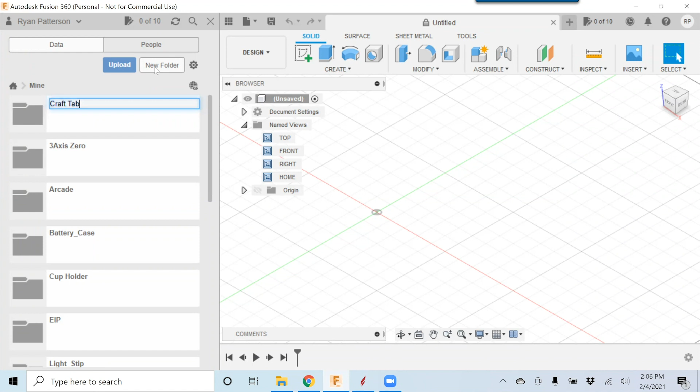So starting off, there is nothing in the folder. It is an empty folder. And we have our design space that is an untitled design space on the left. We have different views that we're able to view from the top, front, and the home.

There is the little, I don't know what he calls it here, the design cube or the orbit cube that you could click on and pivot the design around. Clicking on the top will view the top view, and clicking on any of the other views will show the different views.

If you are first coming to Fusion and have not had everything set up completely yet, and you're like, well, it's kind of looking a little bit differently because when you click top, it may not be the Z up. So there's a couple things that I would recommend doing to start with, and that is clicking your username in the upper right and go to Preferences. And when the preferences open, we want the default model orientation to be Z up.

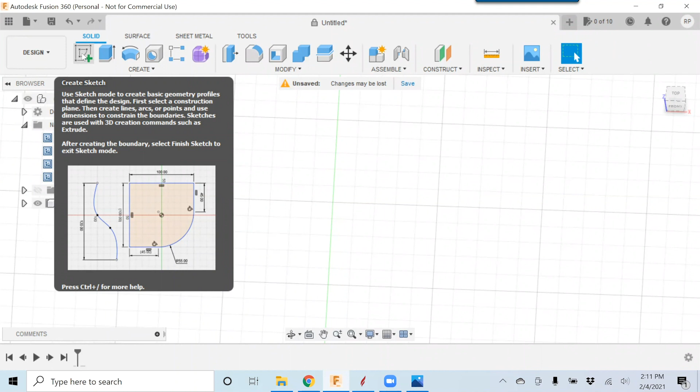The big difference that we have with Aspire or regular CAD versus parametric CAD like we have here, is we are drawing and designing a model. To create a model, we need a sketch to build the model from. So we have sketches and then kind of extrusions off of that. If you're familiar with SketchUp, it works very similar.

So the first thing we're going to start off with is creating a sketch, that is up here in the top left. Going to click Sketch, and now it wants to know what plane, X, Y, or Z, are we going to create this sketch on. So I'm going to click on the top view here, and then click this top surface there. This opens up our sketch tools, and I'm going to come in and out of it a couple of times. So hopefully you're bearing with me and hopefully it'll all come together when we get something drawn here.

So we have our tools across the top here for our drawing functions. If I want to just draw out a simple rectangle, clicking the rectangle tool, coming down to our drawing space, clicking once and moving over and clicking again.

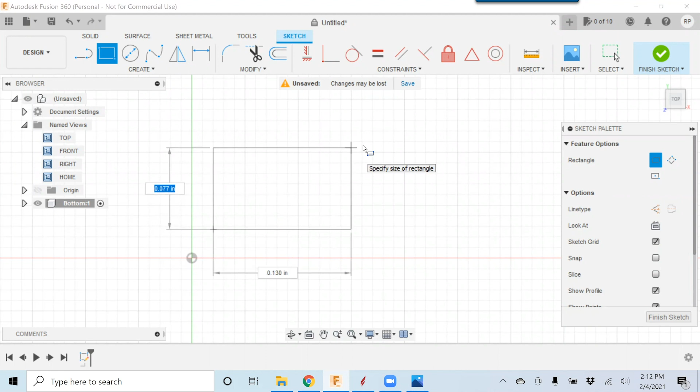I'm going to finish the sketch by coming down here to the bottom right and click Finish Sketch. We now have in our design tree, we see a bottom, and then we have a sketch. Right now it is a single sketch, and that is what we have on the screen here.

This is like a little eye that we could click off that turns that sketch off, and it turns it back on. If we want to model or change any dimensions on that sketch or change the size, right click on the sketch and select Edit. Brings us back into the Edit tools for the sketch. And again, we could click Finish Sketch.

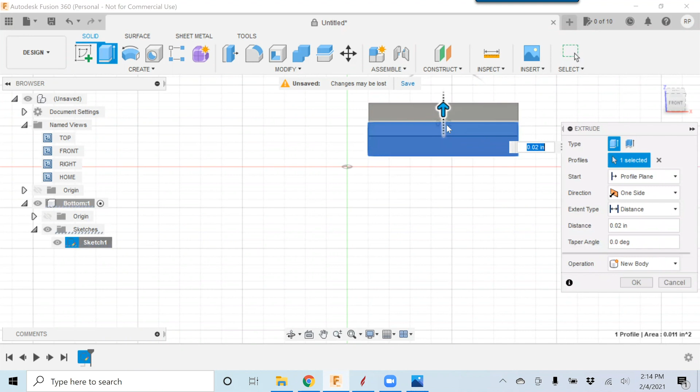To give this some thickness, rotate this around just so we can see that it is just made up of lines, has no thickness yet. I'm going to use the Extrude function. And you just click and extrude. So I'm really not paying attention to exact sizes on anything yet. And this is just the very basics on being able to model and create an object, which is just a basic block at this point.

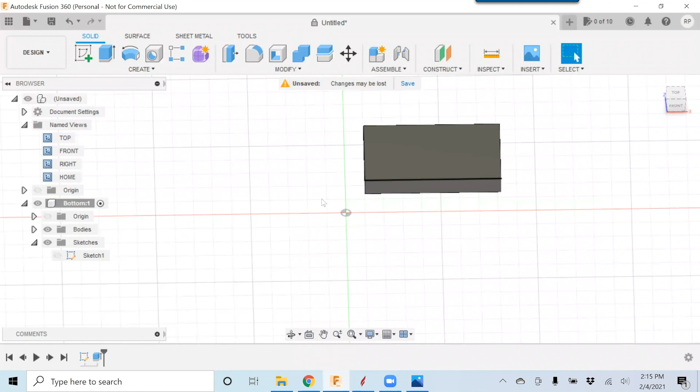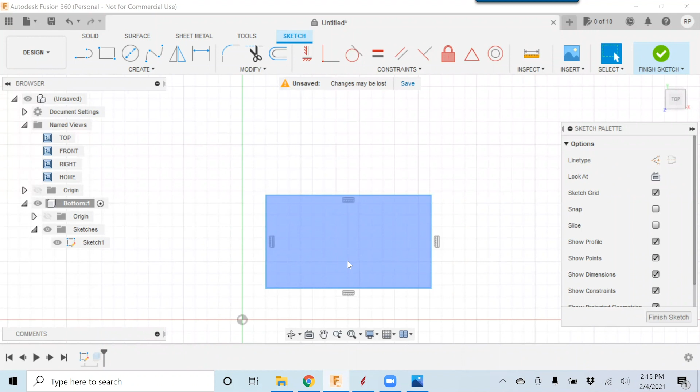I want to add dimensions to this and be able to set the size. So this is where we start seeing some of the parametrics of Fusion. So dimensioning is more than just dimensioning for a drawing or for a presentation. Dimensioning is constraining an object to a set size.

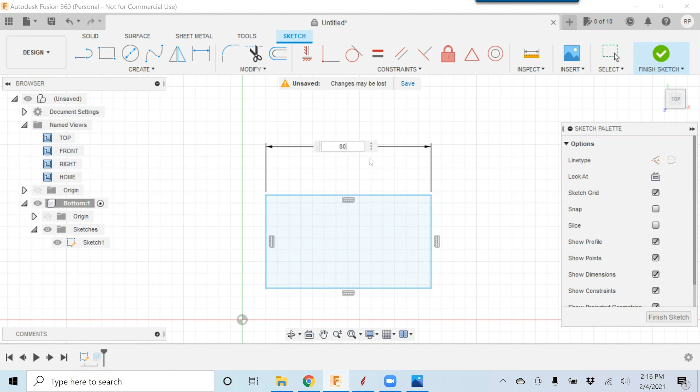So if I click the dimension tool and then come down and notice when you click over top of a line or an object, it highlights in a thicker colored blue. I'm going to click and just drag that up. And we have a dimension there that I am now able to enter in a size. So let's make this 80 inches. And that just grew out there to 80 inches.

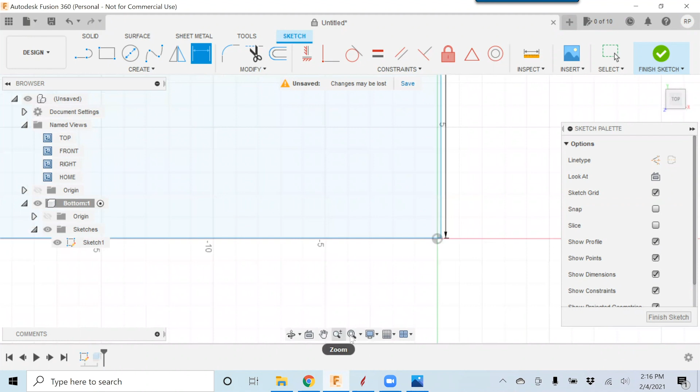And I want to do the same thing for the other dimension, and let's make that 40 inches. So we now have a rectangle that is 80 inches wide by 40 inches tall. We could modify the size of these dimensions anytime we want by double clicking on that dimension, and we could make that 48. And we could see that all of that automatically changes.

That is, if you're not familiar with it, kind of exciting. But it gets much better than that. So we're going to finish this sketch, and we're going to adjust the thickness of this. The thickness is what we have extruded that to.

Across the bottom of Fusion, we have what's called the timeline. This is done in the order of creation. So we've created a sketch, then we have our extrude, and nothing else done. We're going to end up building out more on this. We'll have more sketches, more extrudes, and more data here as we continue on.

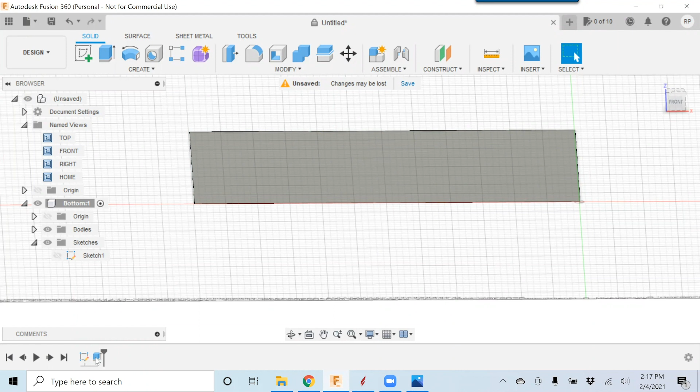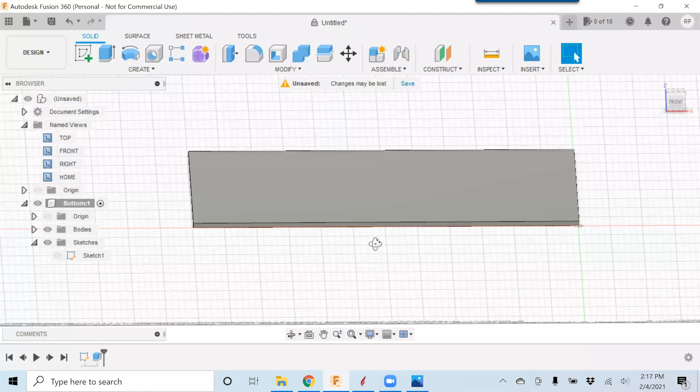I want to edit this extrude by selecting it. I'm going to right click and select Edit Feature. And I'm going to enter in a dimension of 0.75. That's the material that we have for today. So that is the basic rectangle that we would use or have for the bottom section here.

Now I did mention early on that for material thickness, we may want a global variable that we could modify in one place and have multiple items change. We could do that. I'll show that in just a little bit, but before we do that, let's put in some other dados. Maybe I have a dado running right down through the center of this board to create and hold and locate a center partition. So let's learn how to add that to our model here.

I want to edit and create a new sketch. Going to create a new sketch, and the first time I selected the plane, the XZ or XY plane. This time I'm going to select the face of our 3D model. So that means all new sketches that we're drawing are going to be applied to the surface of this face.

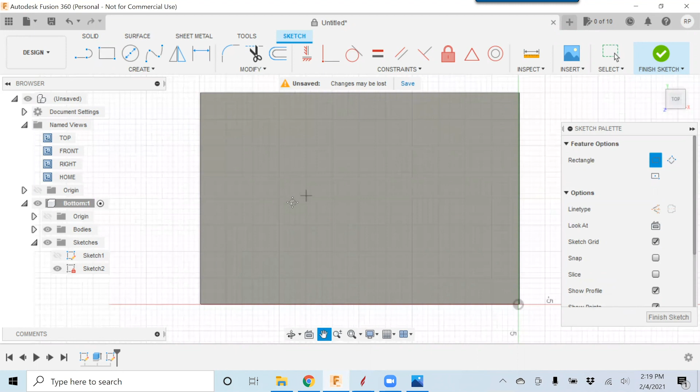And to make that fairly simple, again, I'm going to bounce in and out of this a couple of times so we could see how the relationship goes. And I apologize for those that may already know all this. This, I think, is one of the more challenging parts of Fusion to understand. And once we understand all the relationships, it makes everything so much easier to learn and use.

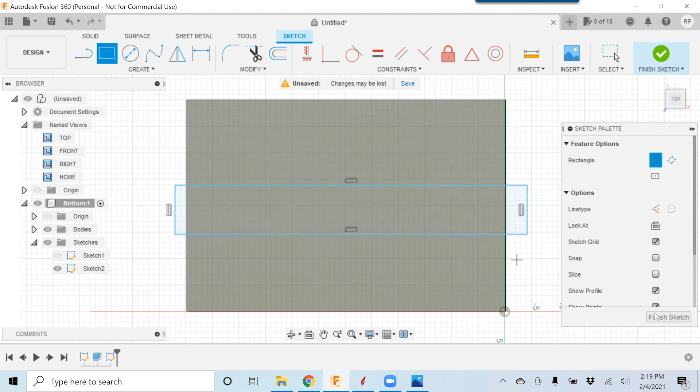So I'm just going to draw out a rectangle. Didn't worry about size or any of that. I just put that in here. And I'm going to finish the sketch. And just as I extruded the main sketch, I'm going to extrude this here, and we could come down with it. And I'm going to enter in a dimension of minus 0.375, which is half the thickness of the material.

And we could see that that is what we have there. But that material or that dado is way too thick. We want to shrink that down and start constraining this to always be in the center of the width. And we also need to constrain the end.

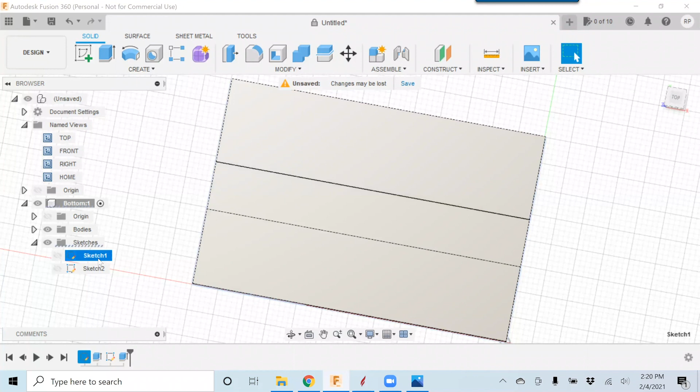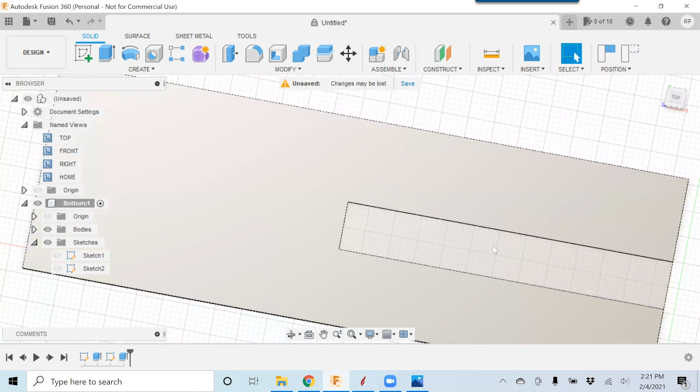So if I edit the first sketch, let's just see what happens here. I'm going to edit this sketch. And instead of 60 inches, just to make it very long, let's go ahead and make it 120 inches. We'll then finish this sketch, and we can see that that dado no longer goes all the way across. So that's what we're going to focus on now and figure out how to always have this dado stay within the center of this object and also within the length.

So coming back into the first sketch, I'm going to bring that back down to a manageable size of 72 inches this time. So we have, again, our main sketch, and then the sketch that is applied to the face of that. So that is what I want to edit, coming into Edit Sketch.

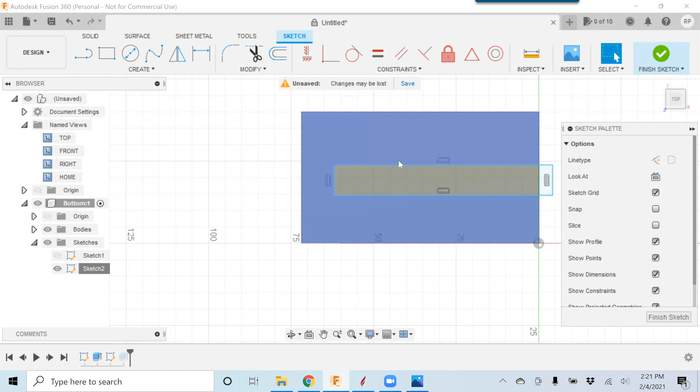And now we're going to start looking at how to constrain our drawing objects from one object to the other object. Constraints are just like the dimension that we put in, and that could be the first constraint that I give it. So I'll give it a dimension constraint, and I'm going to enter in 0.75 for that dimension.

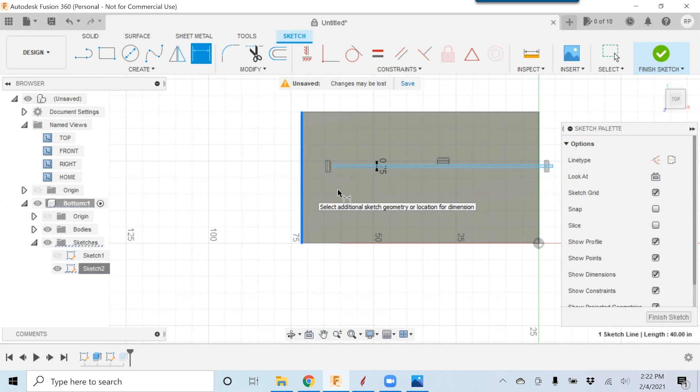And I always want to have the width or the length of this dado to be the same length from the outside to the outside. So you might think, well, the best way to do that is dimension this line here to be 72 inches. Well, yes, that would work, but we want to make sure that that rectangle, that dado, is going to increase in size when we change the size of our main sketch.

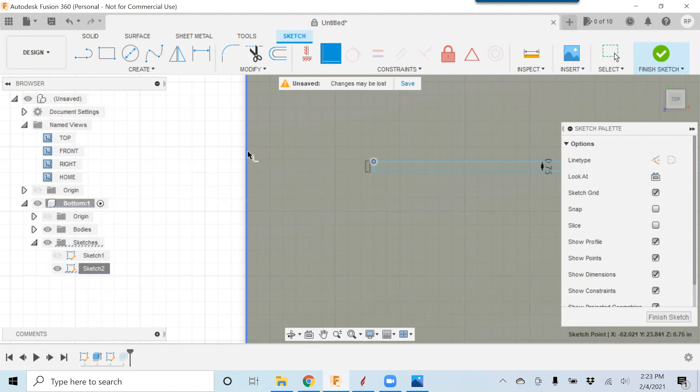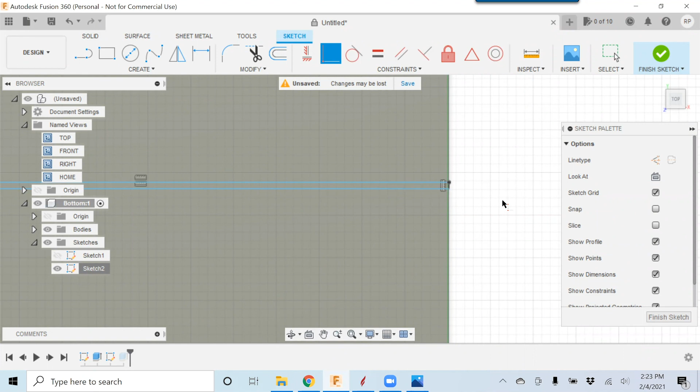So the first thing I'm going to do is click the coincident constraint. This is now able to say, I always want to have this point be on that edge. So you see how that just kind of moved over? And I am going to come over to the right side and do the exact same thing, use a coincident constraint from that corner to that point right there. And that now means no matter what size we change the main sketch to, from 72 to 120 to 48, this dado width is always going to be the width of that main sketch.

What we have drawn so far are drawing objects that we're able to extrude and move from. I always want to have this to be in the center of our sketch here. Now I did say that was 40 inches. So again, we could dimension this and say that I want to have this edge to this edge be 20 inches minus half of the width. Or we could allow it to automatically create and constrain this to the center.

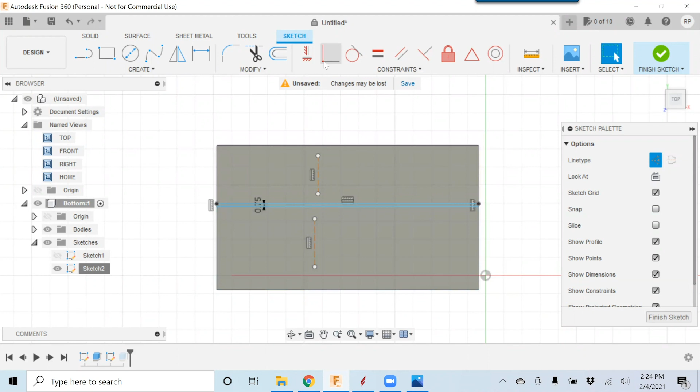And the way I do that is I like to use construction lines. Some software would call those reference lines. So with that selected, when I draw in a drawing object, it is not blue, it is kind of this gold color. And that is just like a guideline or a reference line. And I'm going to use the same constraint that I used for this rectangle to say that I want to have this point to always be there, and the same for this point to always be on this edge.

Going to look at another constraint here, which is a midpoint constraint. Not that we really need to have it, but just to help keep construction lines in a logical position. So I'm going to say I always want to have the endpoint of that construction line to be at the midpoint of that line right there, and the same thing for this bottom one. Now that in itself has not done anything to constrain the position of the rectangle. We could still kind of drag and move this around.

The way I'm going to constrain this to be in the center now is use what is called the equal constraint, where we are able to say, I always want to have this construction line... Let me undo that.

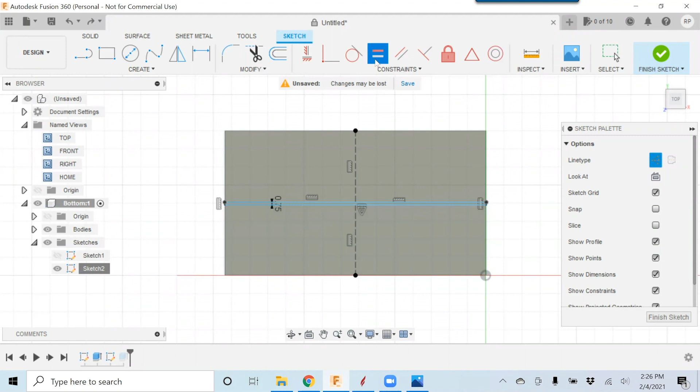To where we could say that I always want to have this construction line be equal to the width of this construction line. Now notice when I did that, my main rectangle there is no longer blue. It has become a solid black. That means that that part or that drawing object now is fully constrained and we cannot move that around with a mouse anymore. It is kind of locked in place and is always constrained to be really in the center of our main part.

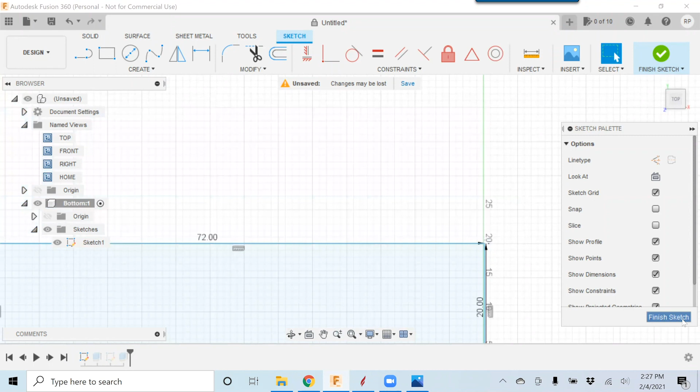So we could finish this sketch and we could see that that will now always remain in the center regardless of what we set the dimensions to on our main sketch. So if I bring this down to 20 inches, we see that that dado automatically recenters itself in the center of our main sketch. I'm going to open up that main sketch again and increase back to 40 inches.

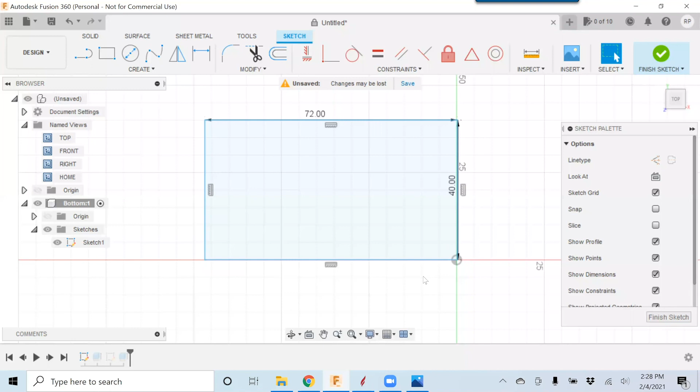So it's asking about why not use, yeah, I mean, there's several ways of constraining a part to be equal. So what I could have done and what's being pointed out is instead of me using the construction line here and setting it equal, I could have set this line to be constrained to the midpoint of this one. That can be done, absolutely. There is no right or wrong to the way you constrain it.

The one thing that I like to do, especially if you're collaborating with a lot of people, is trying to be consistent on the way you constrain parts in models. So when you're working on a model that somebody else created, it is somewhat obvious how it is. One reason that I did this, not to say, like I said, you couldn't use those midpoints. I put the construction lines in there that way, and you see the equals constraint right here.

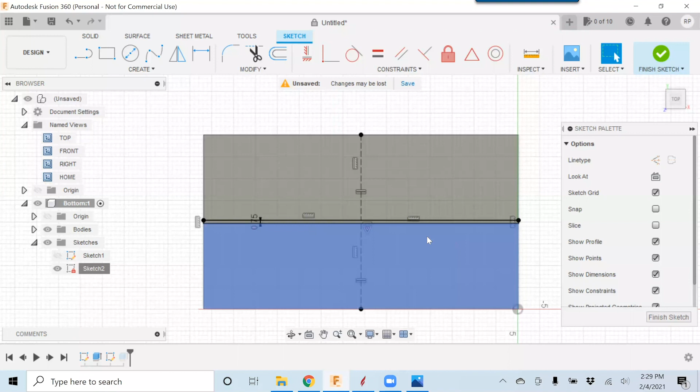It becomes obvious to me when I open this same model up a month from now, and I want to move something or readjust and wonder why that is not moving. It's sometimes hard for me to see constraints that are kind of hidden off to the side. But if I open up this model and I see a construction line top and bottom, that tells me that I was constraining it in such a way. We will see more constraints on how to connect short lines because we're going to have several dados, just like what we created here in the center.

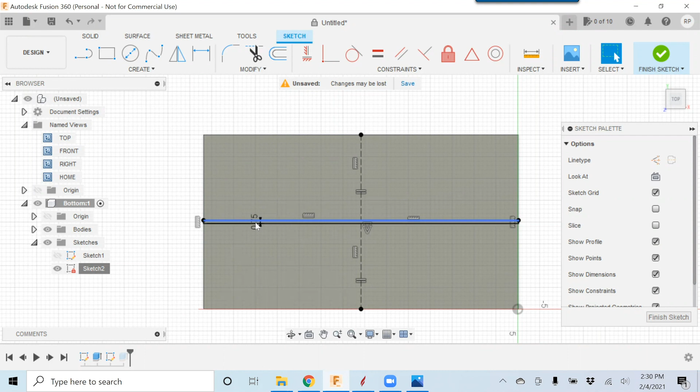Now, we're seeing constraints. Hopefully you guys are getting excited about this because it's exciting just being able to change one dimension and have the whole thing automatically change. We're going to take it one step farther now, because we have this dimension here of 0.75, which is the same dimension as the material thickness. So if we cut this project today and we have 3/4 inch material, but tomorrow we want to cut the project again, but we ran out of 3/4 inch material, we only have 5/8.

Well, that means we're going to have to go into each one of these sketches and modify that dimension 0.75. Yeah, it's not hard to do. You just open that up. But there's some magic here that makes that much, much easier for us, and that's our variables. Let's see what they call them. Parameters is what they're calling them. So coming up into Modify and coming down to Change Parameters.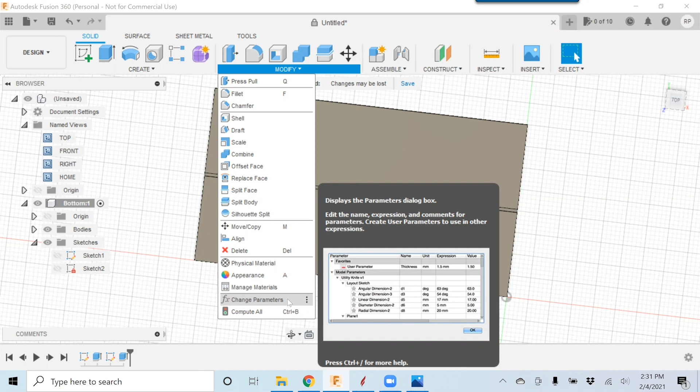Now I'm going to give a warning about variables, and I'll say it again after I show what they are. Be careful how you use them. New users to parametrics tend to overuse variables and make a lot of variables that aren't necessarily needed. So really put thought into what variable names you use and how you use them. So let's see what a variable is.

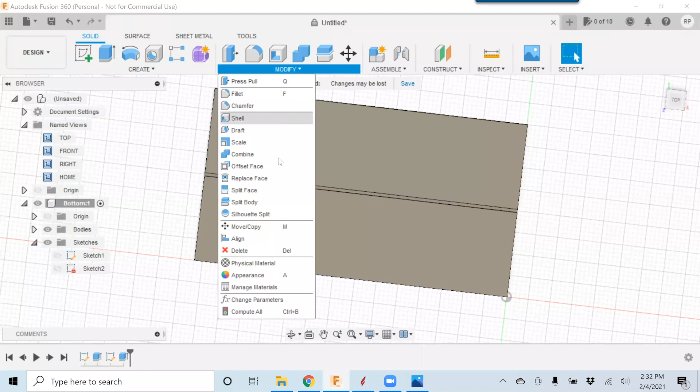So coming up here to Modify and Change Parameters, we are going to add in a user parameter. We'll end up coming back in here again and adding another one, but I'm going to first click the plus sign, and the expression, meaning the dimension of 0.75, and we'll say OK, and then OK here. So we do have a name of material thickness, so I'm going to say OK. Coming back into our dado sketch.

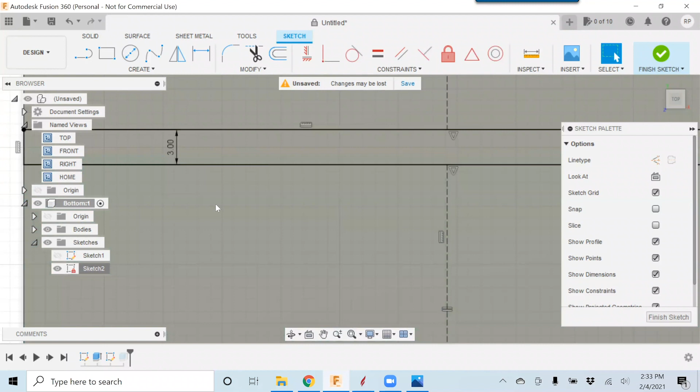And we have this dimension here. Remember I said we could double click on that and change the dimension. If I want to make that 3 inches, we could do that. Automatically goes to 3 inches. And because we have our construction lines that are equal to one another, that stayed in the center.

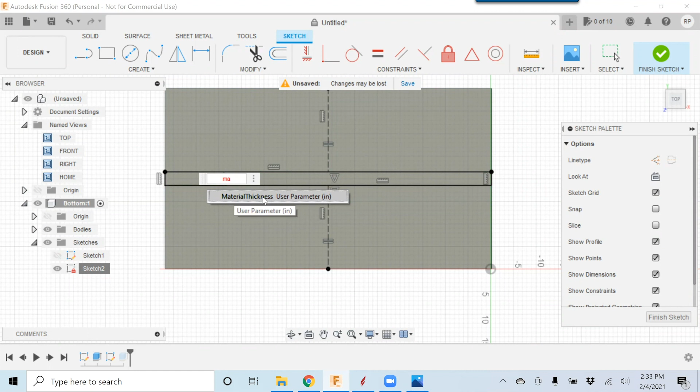But now here's the magic of that variable that we just created. I'm going to double click here. Rather than putting in 3 inches or 0.75, I am going to start typing material. And we see that it automatically pops up our variable here. So I'm going to click on that and say OK. Now it gives us a little prefix there that's indicating that that is a user variable. And it is at 0.75.

So now what that means is when we come up into our change parameters, let's scoot this off to the side, I could enter in a new value here of 3 and enter. And we see that that automatically grew to 3 inches.

This is like an infomercial, but wait, there's more.

So one thing that we have to do quite a bit is, a 3/4 inch thick material putting into a 3/4 inch wide dado is probably not going to fit. You're going to need a good sized mallet to smack that into a perfect fitting dado. We want to make that dado just a little bit bigger, maybe 10 thousandths, 0.01 thicker. And we always want it to be that thickness.

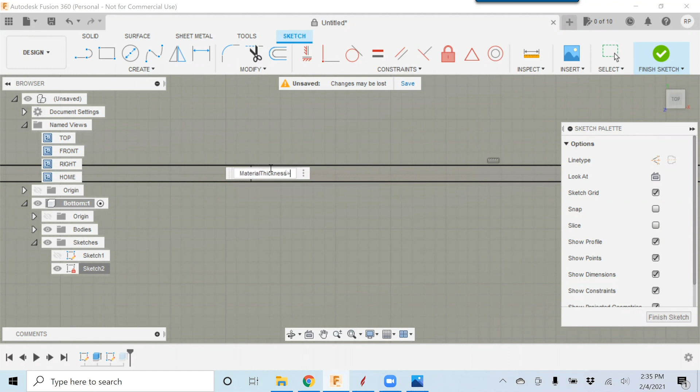So I'm going to right click and edit that sketch once more and double click on that dimension. And now we have our material variable listed there. I am going to say it's material thickness plus 0.01, then enter. So now that is always going to be 10 thousandths bigger than whatever value we entered in there for that variable.

Variables could be used wherever a dimension or a size is used. So if you remember, we specified the thickness of the main extrude, which is this extrusion right here. So I'm going to select edit. And remember, we set that to be 0.75. Instead of being a hard-coded 0.75, I'm going to use the material thickness there as well. Since this is the actual thickness of the material, I'm not going to do any math for that. We'll just leave that to be that thickness there, and we'll say OK.

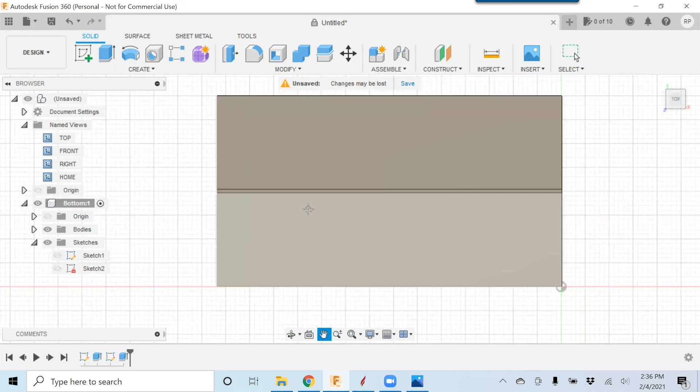So let's go ahead and create two more variables. We have on our main sketch the length and width. Today we're doing a 72 by 40, but tomorrow we might want to do 80 by 48. So let's go back in and create two more variables. And the width will go 72. Let's go 40. You've got to think about how you're going to use these variables as well. And then we'll do a length. And we'll go 72 there, and we'll say OK.

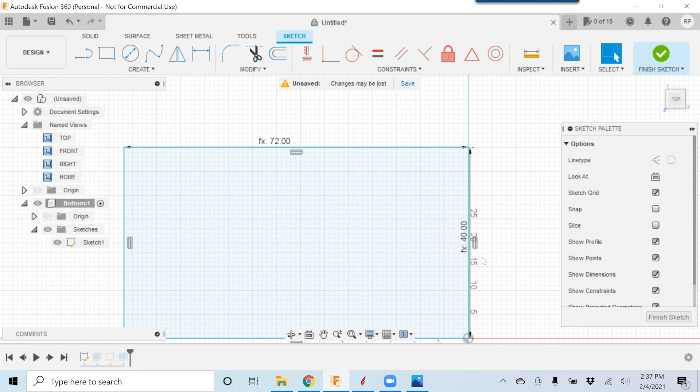So with those two new variables in place, let's modify our original sketch and change our hard-coded dimensions here to our newly created variable dimensions. And variables are made up names. They could be whatever you want them to be named. Something somewhat logical that represents what that variable is actually doing is best practice, but it could be named whatever you would like it to be named.

So we now have somewhat of a parametric part that is easy to change and always keeps a dado in the center. And again, to change any one of those sizes, it's coming back into modify, change parameters. And now if we change this from 72 to 84, we now have a piece that is 84 by 40, and that dado is still remaining in the center.

Yeah, getting ahead of me. Yeah, that's a good one. That is where we're headed now.

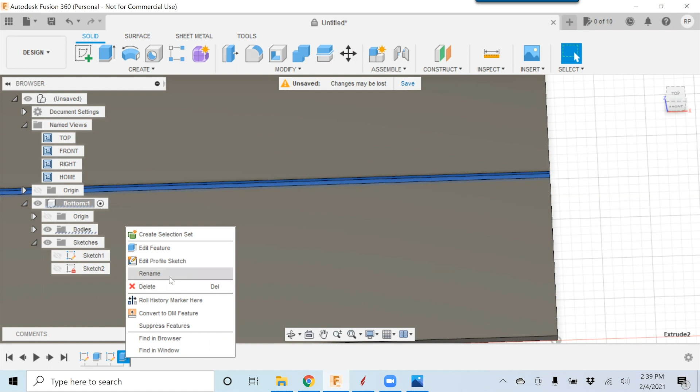So what about the dado thickness, this material? So right now, we hard-coded this dado right here to be a depth of, I think it was 3/8 of an inch. So say if we were going to cut this out of 5/8 material, that dado could be a little bit weak at that point. So we really want to have some sort of relationship of the thickness of this dado to the material thickness.

Now, pay attention to that negative sign in front of that value right there. That negative is saying that we are going down into the material. So if I just put the material size in here, it is not going to go down into the material by that setting. It's going to be projecting up. That's not what we want.

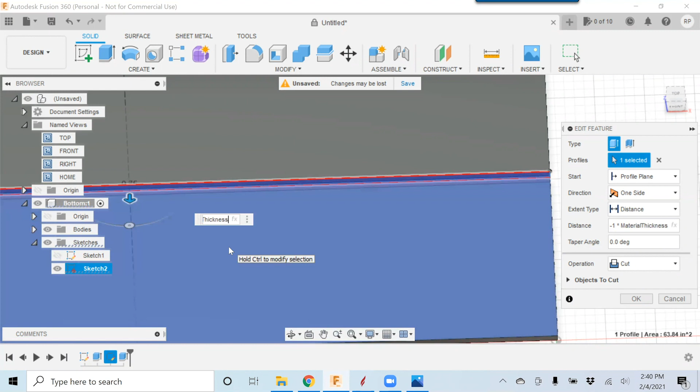So if you remember, two negatives make a positive, a negative times a positive makes a negative. Well, you know what I'm talking about. So we're going to go -1 times material thickness divided by 2. So that is going to allow us to control the depth of that dado based on the material thickness.

So hopefully everybody is starting to see the benefits of this. Now, some of you might be head spinning a little bit, trying to understand what's going on. Another bunch of you is probably saying, well, just move on with it already, I understand it. Well, we're taking it slow, and hopefully by next week, all of you will be able to create a parametric model like this, so that we could continue on with assembling this and checking the fit to make sure everything fits together.

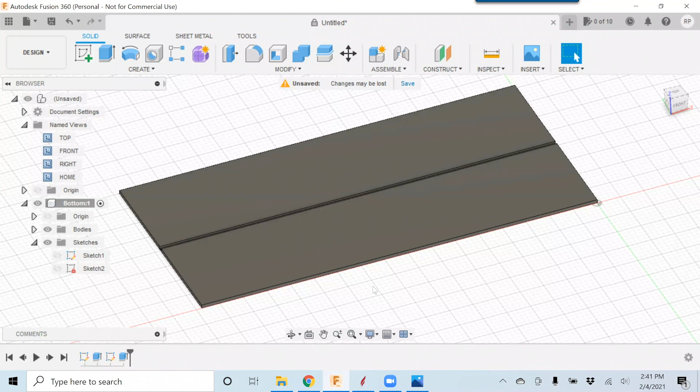So Paul is asking if there is some sort of data table behind the scenes somewhere. There could be. I am not familiar with it, so I will try to answer that question next week and get that answered for you. So let's just move on and create one more dado or a couple more dados, and then we'll look at how to add another part or create another component.

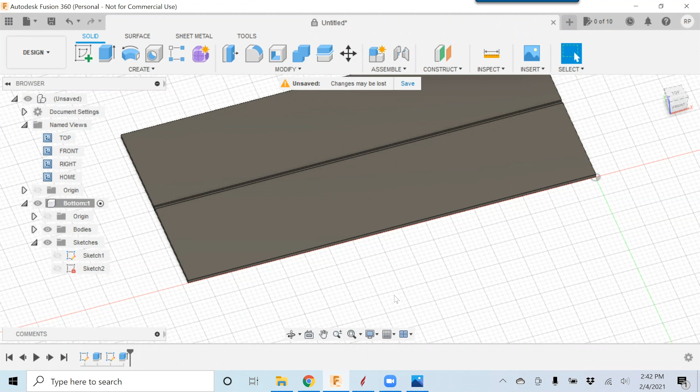Yeah, one question that was brought in: adding the tolerance. Could we add a variable to add in that tolerance? I added that 0.01. So yeah, you could have a variable that's called tolerance. And that is where I would caution you a little bit, that might be getting into the realm of overthinking variable names or over-variabilizing, if that's a word at all, the parametric model.

So I want you to think, when you're creating a variable, will we ever need to change this in the future? If yes, we are going to need to change the size of this width or this tolerance a lot, based on material thickness and all of that, then yes, you might want to add in some sort of tolerance variable. But if regardless of material thickness or material type, your tolerance is always going to be that 0.01, I would not make a new variable for that.

But let's focus on creating another dado, or actually a couple more. So I want to create a couple dados on the face here. Before, I was selecting create sketch, then the face that I wanted to create the sketch on. This time I'm clicking the face, then create sketch. Either way works. As you see, this time it just automatically brought us into this.

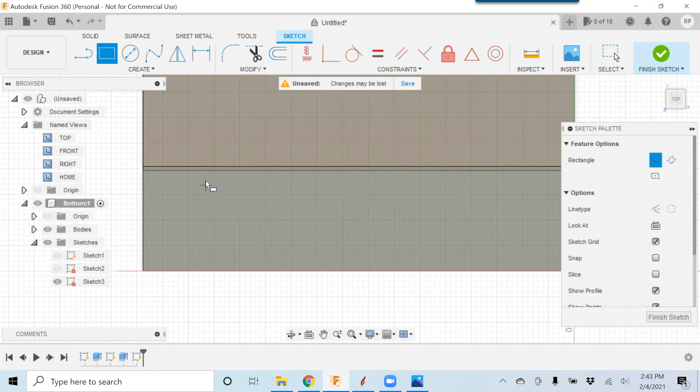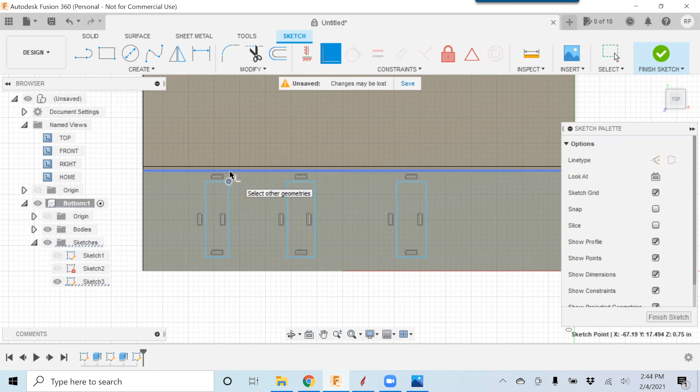So to more quickly go through this, I'm just going to draw out a couple rectangles, and I am not worried about sizes yet. Just put 3 of them in there. And now I'm going to start constraining these. Again, we have our coincidence constraint so those are always the same size. Now, my next step, there are several ways of going about it. This is my method. I'm just making them different lengths to show one more constraint here.

What I'm going to do is create a construction line from the endpoint out from each one. Now notice that really did not go to a construction line, but another line did. So this line right there is a construction line, because it was selected when I clicked that button. So if any lines are set not as a reference line but an object line, you could select it, come over here to the line type, and tell it that it is a construction line.

So the reason why I moved these to different lengths is to show the 2 variables or constraints that we have here. They're a horizontal and vertical constraint. For those that are coming from SolidWorks or Inventor or other programs like that, you usually have a horizontal constraint and a vertical constraint. Well, Fusion has linked those together, and it is pretty smart about which one it wants to do. And it's going to pick, in this case, horizontal because these lines are more horizontal than being vertical. So now when we move 1, all 3 of those dados,

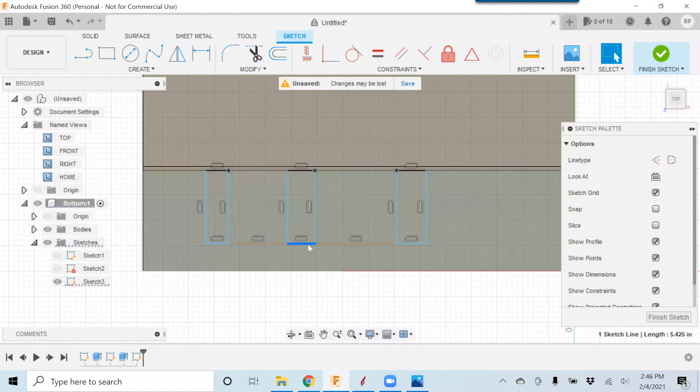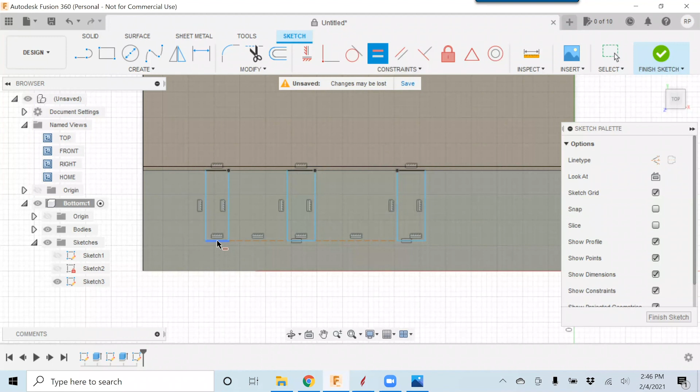rectangles, shift and change size. The other thing that I like to do is make them all equal to one another because I always want to have those the same size. I could come in and set a dimension to each one. That would work just the same way, but I like to minimize the amount of dimensions and use the constraints. And that is so that when you come back into it later, you change one variable and they all will change the same. So my next step is creating all of these rectangles to be equal to one another. So now when we change and drag the width out, you can see all three are going to the same size.

I also want to point out that, see, we have this light blue line that is making up that rectangle, and then the back section of this line is black. So the black line is saying that's constrained to this line. You're fully constrained there, but the blue, we are not constrained.

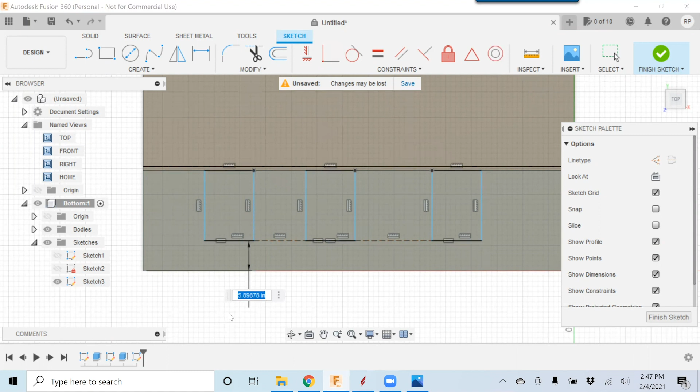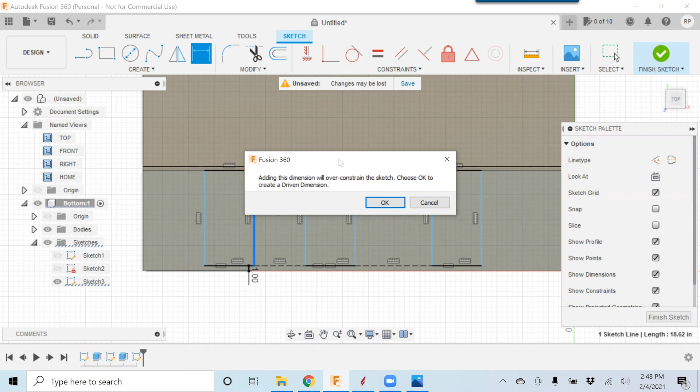So what can happen at times is if we have, say, a dimension on a line, or if I said, let's have this always be the same size as here. Let's go ahead and do it this way. I apologize, skipping around. So let's give this a dimension from here to here and say that I want that to be inset maybe 1 inch. So we have the back side is constrained, the front side is constrained. Well, what about the depth here? Can I set that to be a number? No. So I'm getting a message that says that I'm over constrained, that I can't do that. And you could get a message like this frequently until you start understanding where and how the constraints work.

So what has happened here is I am locked in and constrained to the backside of this dado. I also have the front side constrained, which means that the width of this line here cannot be changed other than by changing the width of our main sketch. Hopefully that explains it, but it's just over constrained; we can't have more than one variable that controls the width. So we have a constraint to the front. We don't have one on the width. So this is where I am going to use the dimension again for this one and set it to be the material thickness plus 0.01.

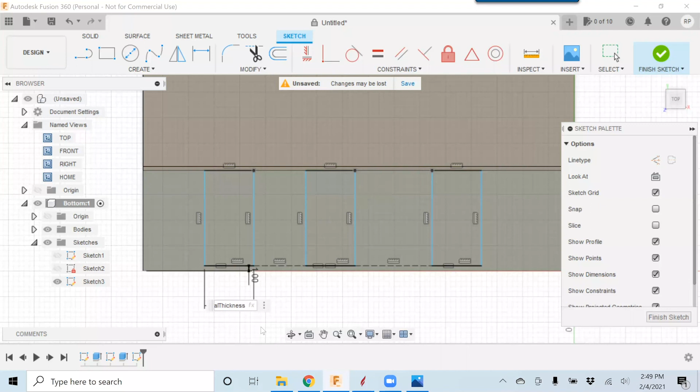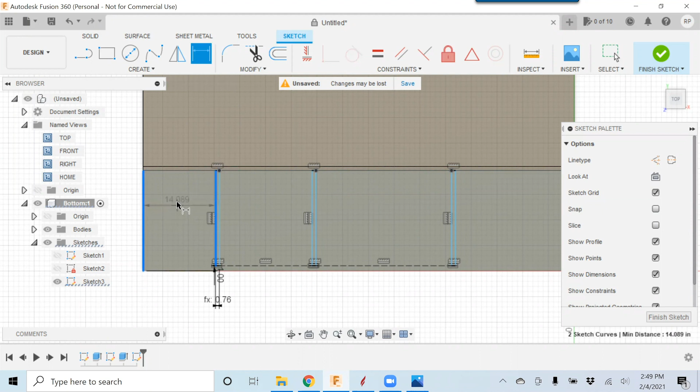Now we still are not yet fully constrained. I know that because we have these blue lines there. We could still move them right to left. So now I'm going to set some fixed dimensions here because I'm always going to want a shelf off to the left. I always want that space to be 14 inches, and the space between these two here, I always want to be 18 inches. And then the space in between these two, let's set that one to be 24 inches.

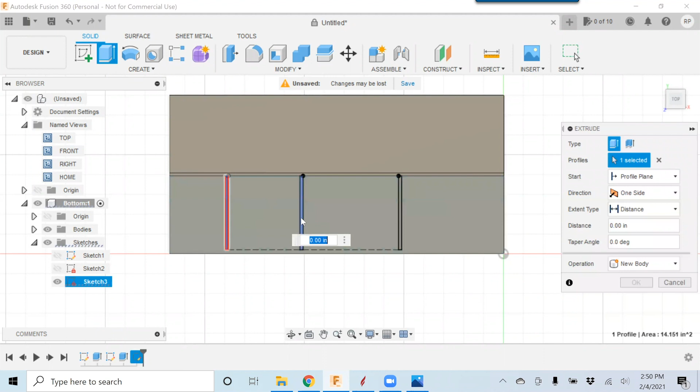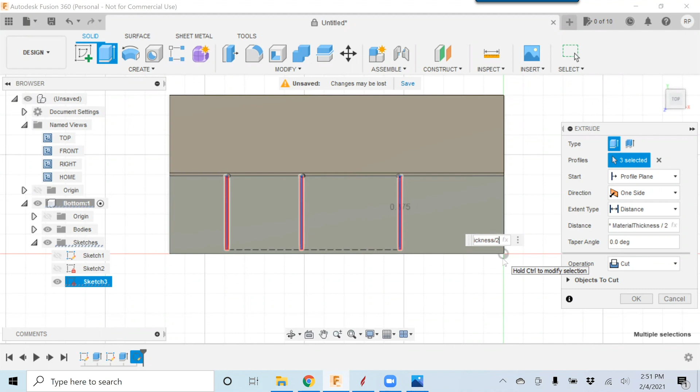So now you see that they are all black, meaning that if I add any more constraints here, I'm going to get the message saying that I'm over constrained and I can't change anything. So we're good there. That's what you want to see. You want a fully constrained part. So I'm going to select Finish Sketch. And we will extrude these parts the same as I did the center dado, by -1 times material. -1 is converting the positive to a negative. And then I'm going to divide that by 2. And now we have our dados to put a center partition in.

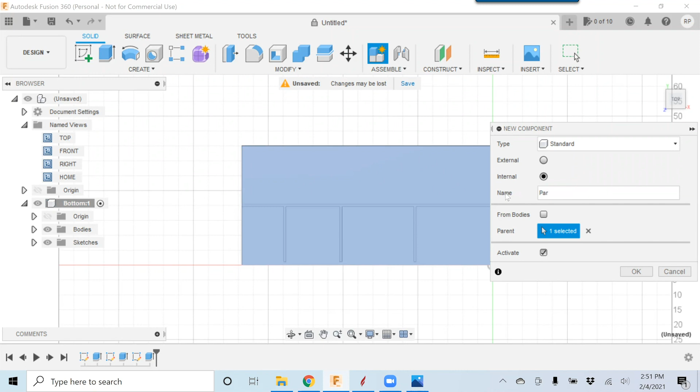Now, with that created, there's still more work to do in here, but we're kind of running out of time. We've got this component we've been working on, the bottom. We need more parts to completely finish out our design. So to add another part, we don't want to create another sketch within the bottom section. We want to create a new component entirely. So I'm going to right click and create a new component, and we'll just call that par for partition. And we see that now in our tree, we have the bottom and a partition here. If I don't want to see the bottom part, just hide it.

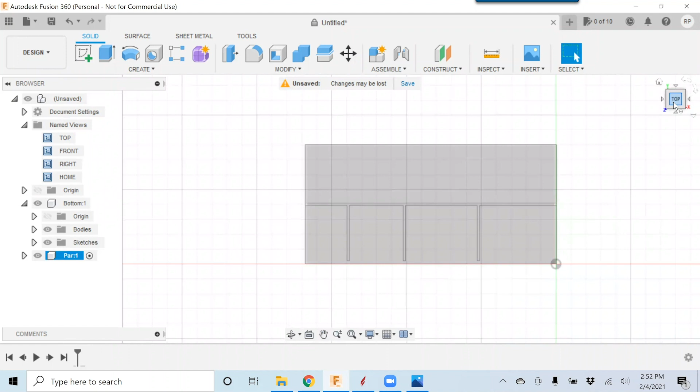But I'll leave that open and draw out on the top view a new sketch, in just the same way we created this sketch here. Going to use the rectangle tool, draw out the size. Dimensioning is going to be based on how high do we want this. So let's say we want it to be 26 in this direction. But now we have this dimension locked in here.

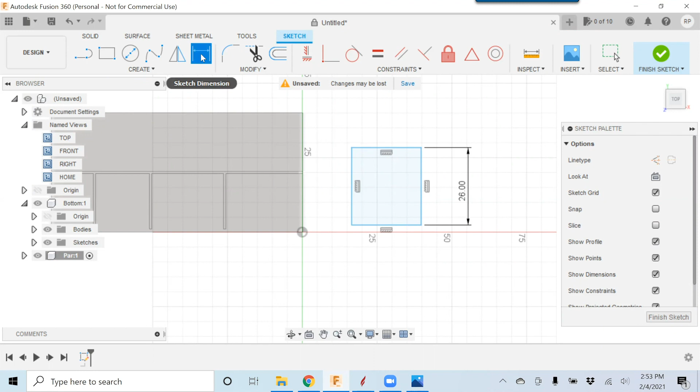I'm not going to get the math right the first time, so I'm going to try and attempt to do it, but we'll see. So what we want to do is set this dimension to be equal to the width. I'm going to go divide by 2. And we want to subtract out the width of the dado. So let's see if that is right by material thickness.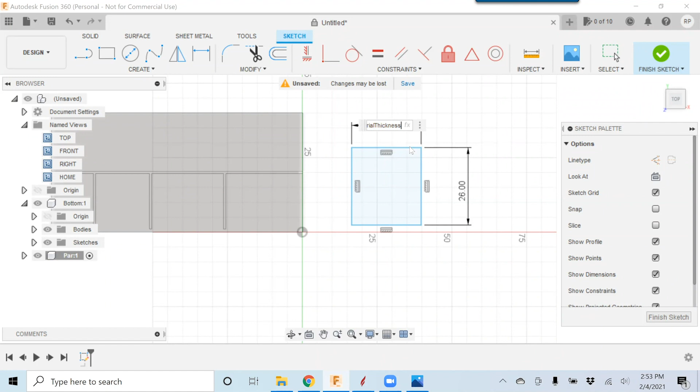And we were 1 inch in from the front, so I'm going to go a -1 and see if we get lucky. I might have gotten lucky. I don't know. We could use a measuring tool to check that. So that says that is 18¼ inches. I'm going to finish the sketch, select that object there, and I'm going to extrude it to a thickness of the material and say OK.

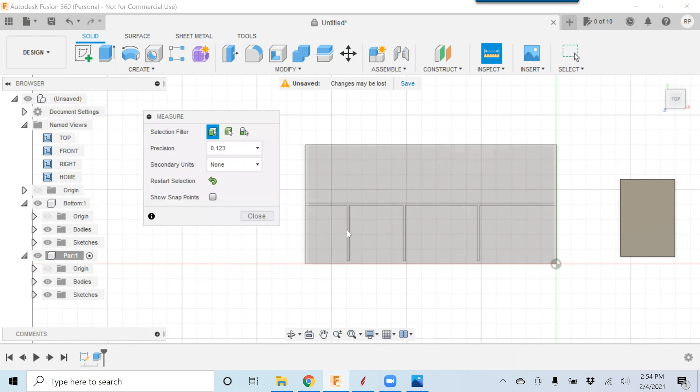Now let's see if that 18¼ is, or 8, is that what it was? Now we'll learn how to use our measuring device right here. So click the measuring tool to click on that line, and that is 18¼ inches. So that's good. And let's see if it matches up. It did not. So there's something in my math that is not quite right.

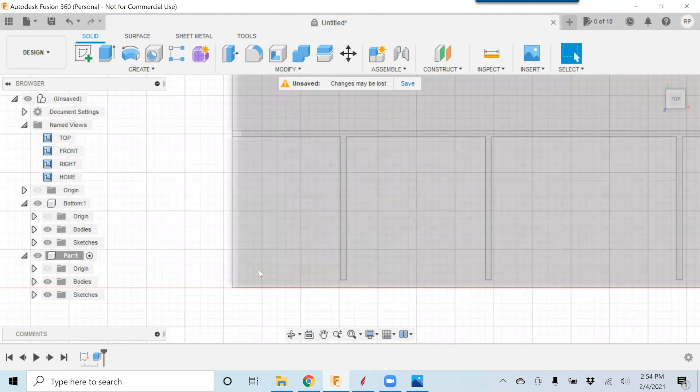But I hope you guys got the understanding of the use of variables and being able to do math inside of that variable. I could always come in and edit this sketch and modify my variables and the dimensions by coming in here and making the modifications. So I think it is, I did not divide. Maybe the material thickness also needs to be divided by 2.

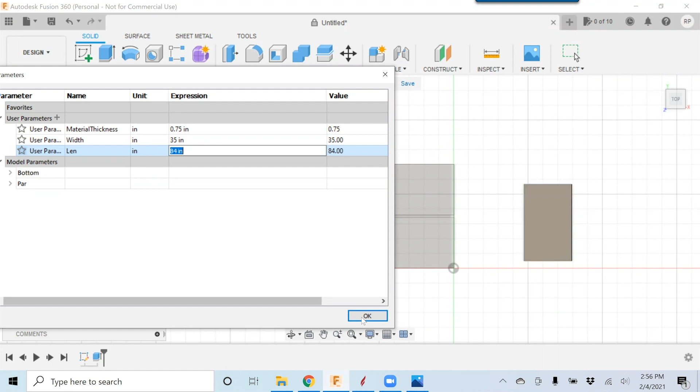And there it is. So we could see now that by changing the main variable under parameters, changing the width, I'm going to shrink this down a little bit just so we could see the magic happen. We have 40 inches wide right here. So say we don't want it to be 40 inches, we want it to be 35 inches. We see how this got smaller, and so did our partition that we have here. So that is what parametric modeling is all about and how it works.

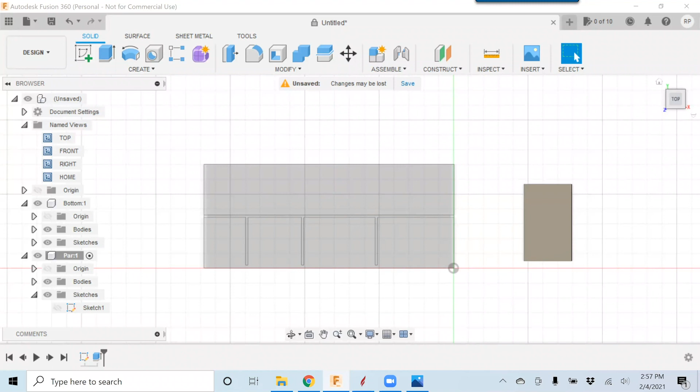And what you want to be able to really do is think about how all the parts are going to be constrained by one another, how you're going to use variables. Sometimes you may want to pre-map out what variables you're going to use, because you could very quickly get too many variables in there because you think you need them at the time. So you create a variable, and before you know it, you have 110 variables in there that you can't make any sense of. So keep variables to the minimum and only what you would really need to use.

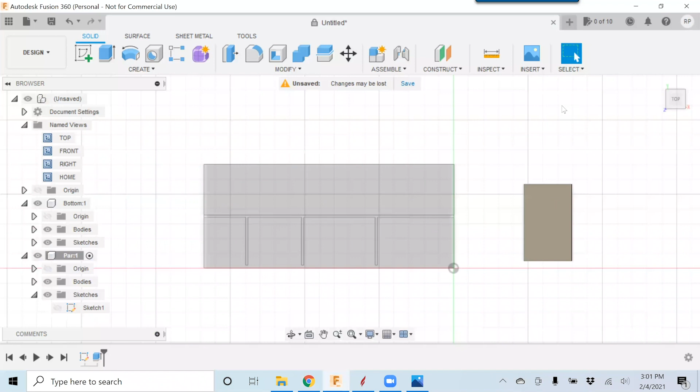Well, thanks again. So I have some questions that have come in through the chat. Somebody asking about what setting did I use to make it come into the flat plane automatically. So, for moving these around, there is the orbit button here. So if I want to view it from the top, I'll just click the top view. And then we have the zoom to fit buttons down below. Hopefully that is answering the question.

Another question that has come in through chat is just wanting to take a look at my preferences. Once more, upper right, you have your username. Selecting preferences opens up the preference screen.

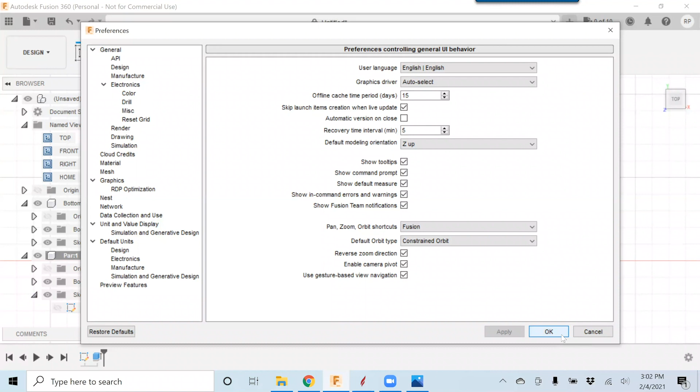So the dimensions for the cubby area here. I'm thinking kind of out loud again now. I'm hearing cubbies. It might be that you have a set storage area that you're wanting to set to. I'm going to point out one more thing here. Sorry. So you see this little option here that says that I'm editing this part right here. If I want to edit the bottom, I'm going to set that option there so we could view this sketch to see those cubbies.

We may want to set up a variable that specifies the width of a basket or a bin or some sort of device that we had there. So there are the variable dimensions for the cubbies.

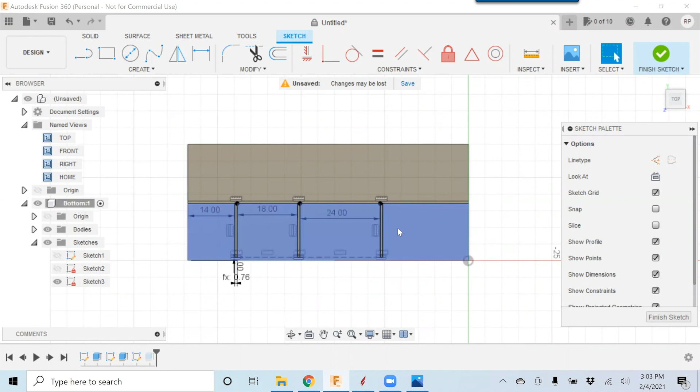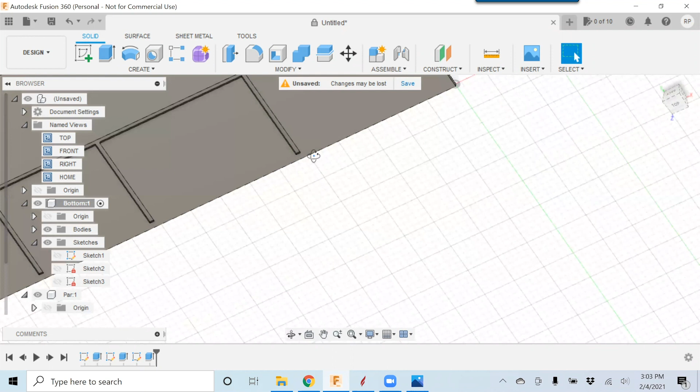So yeah, fillets, definitely. That's a design possibility. Even though our model here shows this being square, that is not square. That is going to cut to the radius of whatever our bit is. So I would use a 3/8 diameter cutter for this. And so to avoid having to put dog bones or T-bones in there, what we can do is add a radius to the outer sections here, and that could be done right here under the tools.

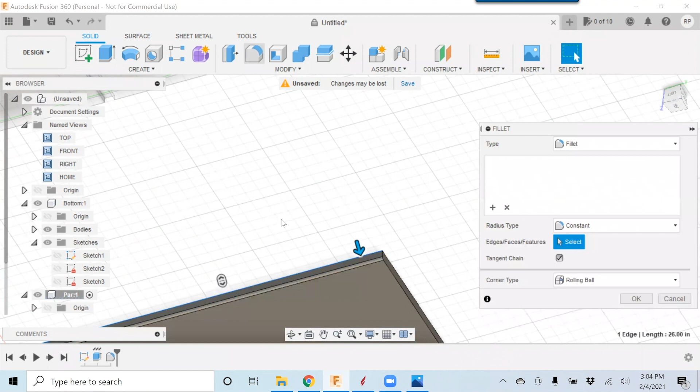I'm going to select this line here and say that I want that to be 0.187 and do the same thing on the other side. Should have clicked on both at the same time. So now we've created a radius on the edge of our parts that we could use a router table or a hand router to do later, or the machine if we wanted to do it as a flip operation.

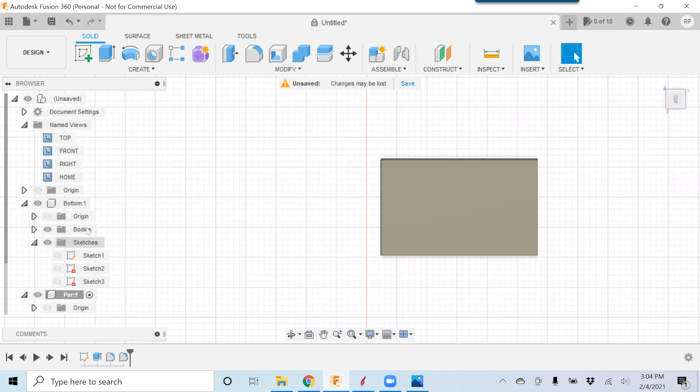With the fillets, I'm one that would rather put the fillet on there rather than a dog bone or a T-bone. A fillet kind of makes that a little smoother, eases the edge a little bit, and just makes a nicer fit. That is my opinion, if it matters at all.

So someone's asking about Fusion versus cabinet making software. The biggest thing is, even though we're able to design and lay out parametric cabinets within Fusion, as we are doing, using a dedicated cabinet making program will allow you to much more easily get all of the parts nested out and laid out on a sheet of material. It'll be a little bit more straightforward of a process and just much faster overall.

Even though we are parametric here in Fusion, we still have the tool pathing that is kind of parametric, but not really. It is a little bit of a challenge getting them laid out, where dedicated cabinet making software is much easier and quicker.